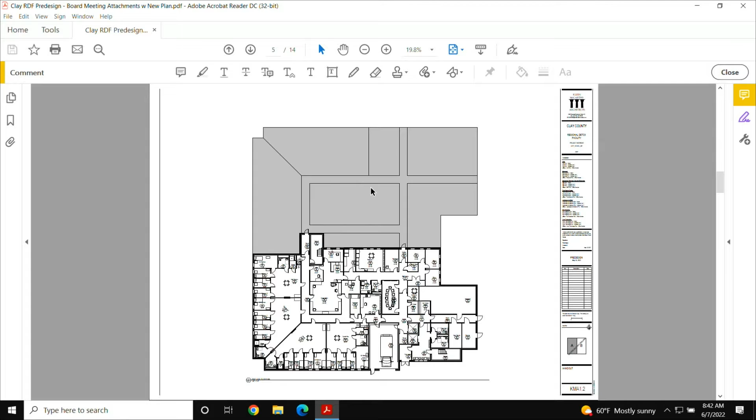This was the second rendition of the site. This is looking as you would just turn off the avenue and head into the facility, from the southeast corner.

So you start to see what we're looking at as multicolored brick, trying to tie this a little bit in theme to what the jail and joint law enforcement are, using some of the same materials and color schemes. So we've got multicolored brick, and we've got some metal panel up here to try to keep some of the costs down.

Again, looking for materials, knowing your budget and using the grant money, we're looking for those that we can get started with right away versus a precast. We don't need all the parts of the building to be that secure and bare where we're coming back in. So we were looking for those types of materials, and then just a little bit more articulation, bump outs and things on the front, just to give it a warmer feel, break up some of that massing, not knowing what's going to be in that development area in the future.

Is that front the Sally Port? We've got the front area here, this is one of the features being considered, kind of a front porch awning type feel. And then this is the intake Sally Port area here.

And then you see from this point back, you see the housing with all the windows there. And then if you go around the side, you get to the conference room on the right side and offices to the far right.

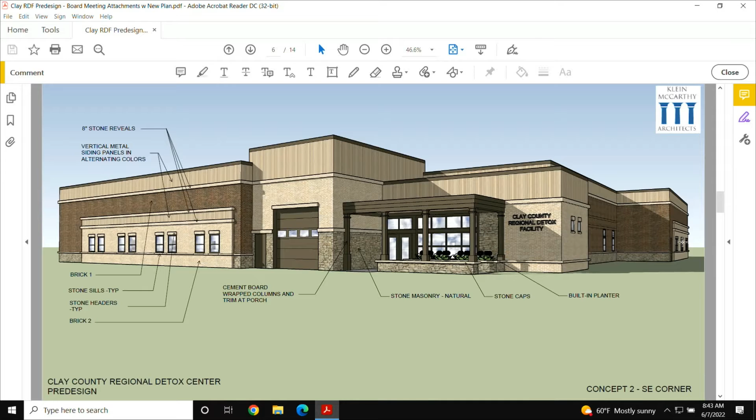This is from the southwest corner, so we're getting it from driving along the avenue from the west to the east, just putting a little bit more articulation. So the rest of the housing goes back along that wall, where that light colored brick and the windows are, that's all housing on the left and the right side of the drawing.

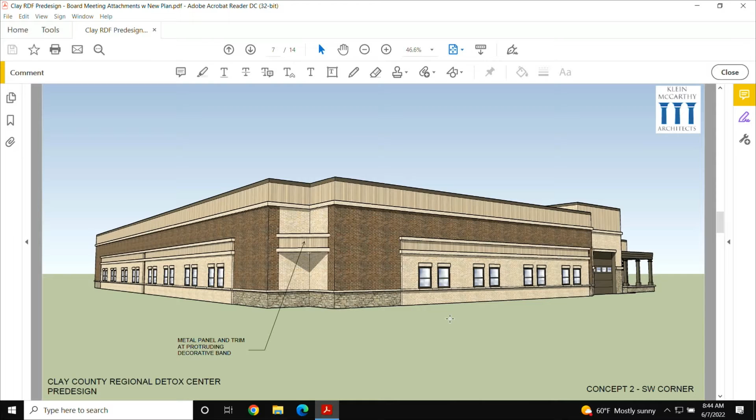This is really the north side of the building. We've got an exterior, and in the value changes, we bumped the vestibule inside the building, but we do have a fenced, enclosed outdoor area that patients can go out to.

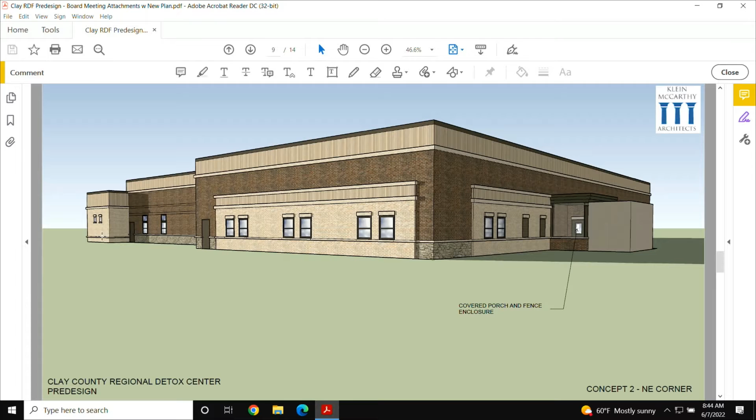This is looking at the admin area, so you're seeing that with these windows, some mechanical louvers back here, and then administrative offices across this side. And then we get back to the front lobby area up here and around the corner.

So this is just a straight-on view of what it looks like from the avenue to get an idea of the overall scale. We put some dimensions on there just to give the construction engineers enough data to be able to price this out, more than just a square foot price.

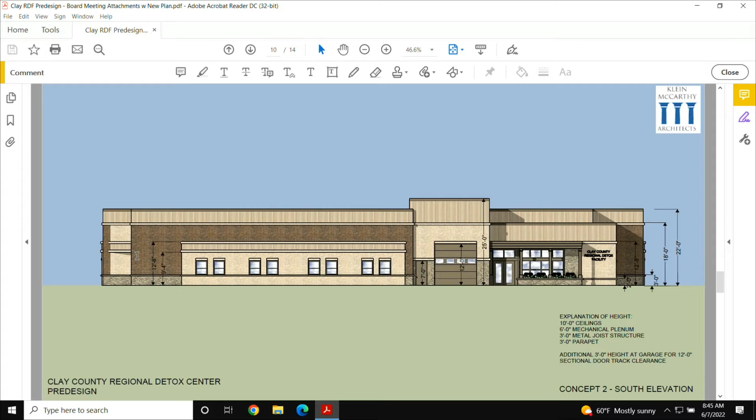So this would be the south elevation, the west - you start to see it in a little different scale - the north, and the east.

So I think with that, we'll get into having construction engineers run through the two options, the one-story and two-story. And then there are options at the bottom if we wanted to structure the one-story to be able to go vertical in the future. We asked them to put a price to that also, and then some of the other design characteristics as options.

Construction engineers, I'll go ahead and hit some of the highlights. There's a lot of numbers here and a lot of information, so I'll kind of hit the highlights and then we can go into whatever detail you want to.

So I'll start in the kind of bronze line that says total project budget. The first set of columns is the one-story option, so you can see that's at just under 14 million. The two-story option is just under 16.8 million.

The square footage, like was discussed, is kind of the big difference there. Some expenses that you get, like added stairs and elevators needed for the circulation space, that's the big difference between those two.

Moving up, I just want to talk about contingencies. Right now we're showing a 2% owner contingency, a 3% construction contingency, a 5% design contingency, and then 3.5% escalation, which if you add all those numbers up, there's a lot of contingency. But at the phase of design we're at, we feel it's appropriate.

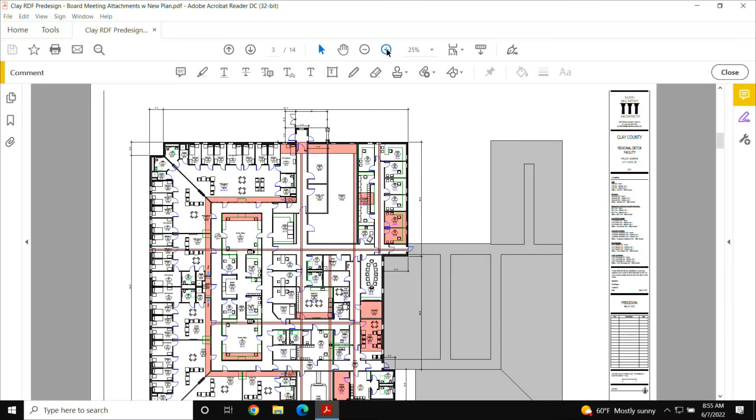It looks like it's about, this square right here, that whole quadrant, how many square feet would that be? I think it's about somewhere between 3,000 and 4,000. Okay.

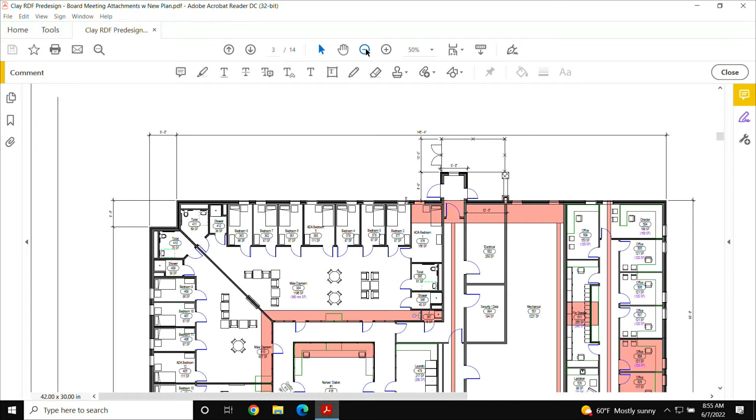And in terms of if this board decided to go with a two-story, that really does change things, Troy, maybe this is an opportunity for you to come up here too. This does change the staffing needs. We'd have to have different, more staffing to account for both stories. And in terms of transporting the clients that Troy's staff serves, there's been some inefficiencies identified if we were to go with a two-story. I know you've given us PowerPoints on that in the past, but in terms of the design specifically.

Yeah, essentially, if we had a two-story with 16 beds on the lower level and another 16 beds as the original pre-design was that Scott did, what that does is, we average, there are days we have 16 now. So my thoughts are almost immediately as this building opens, we're going to have more than 16, which means we're going to have to double the staff and run 24 hours a day, 7 days a week, 365 days a year for both floors. With the one-story design, as we progress, we could add staff. I think we had it figured out that we would need probably another 10 full-time staff to cover what we need upstairs.

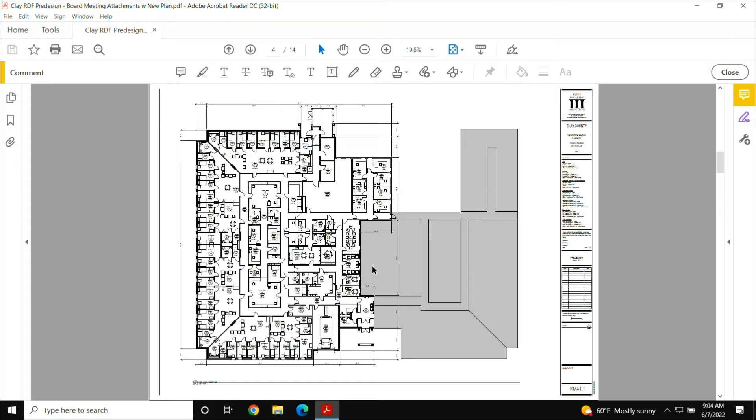Yeah, we're gonna have a heck of a time staffing it. So it's probably more than half, because the stairs and elevators are a bulk of that. But is it 75%, 60%? Cost-wise, it's in the realm of $35 a square foot as a very rough budget.

The bigger question is, are you adding the stairs and elevator onto your ground floor square footage when adding the second floor, or are you adding square footage to your first floor that you know you're going to later strip out and put elevators and stairs in? So it's 35 plus room for stairs and elevators, I guess is how I'd look at it. I'd probably do it in the future, why spend it now on shelled boxes that you're not using or using for storage? I think I'd just design that, master plan that, so it could be designed. That's all I'd be asking for.

So if it was 2/3 the cost, 60% of the cost, or 30? I mean, if half of the building is structured that way, and we're at 21,000, let's say 22,000, so 11,000 times $35 a square foot. And then throw some soft costs on that, which I think is appropriate to talk about.

I think, though, part of the issue is if you were constrained by land to do that, you need to think about what the cost trade-off is, and what's your cost per square. Does it make more sense to just go out on a ground level when you have a site that could support something like that? I certainly think growth for the future makes sense, but if the bulk of your cost is in stairs and elevator, and we've identified that this is a clientele that we're having difficulty dealing with stairs and elevator at our current site, does it make more sense later on to not have to deal with that?